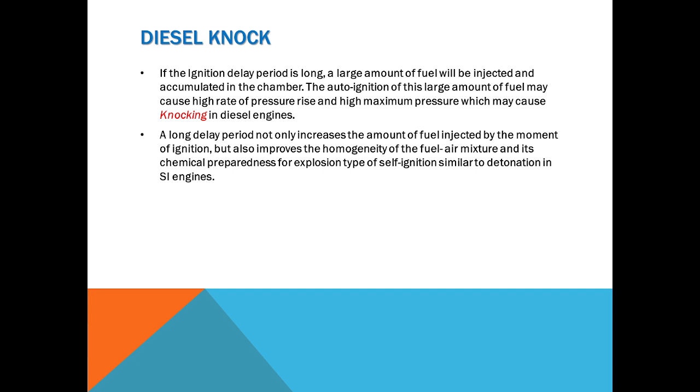A long delay period not only increases the amount of fuel injected by the moment of ignition, but also improves the homogeneity of the fuel air mixture and its chemical preparedness for explosion type of self ignition, similar to detonation in SI engines.

Methods of controlling diesel knock. Diesel knock is an abnormal combustion where we have observed that if the time required for ignition is more, due to the larger amount of fuel available for combustion, a large amount of pressure is generated and knock is observed.

What are the different methods to control diesel knock? The first is high charge temperature. If the charge temperature is high enough, then there will be a shorter ignition delay period and no accumulation of fuel will be observed in the combustion chamber.

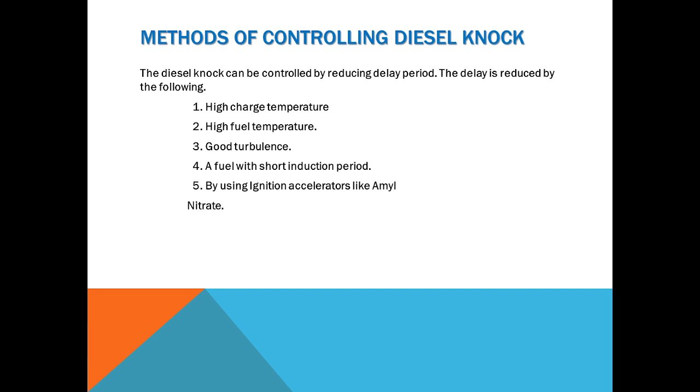Then high fuel temperature, good turbulence, a fuel with short induction period, and using ignition accelerators like amyl nitrate.

Now we will compare the phenomenon of detonation in SI engine and knocking in CI engine. Detonation occurs near the end of combustion, whereas knocking occurs near the beginning of combustion, that is, at the end of the first stage of combustion.

Detonation in SI engine is of a homogeneous charge causing a very heavy rate of pressure rise and high maximum pressure, whereas knocking in CI engine is of an imperfectly mixed charge, and hence the rate of pressure rise is normally lower than that in the detonation of the SI engine.

In case of detonation, pre-ignition may occur. Hot spots develop near the spark plug, and even before the spark ignition, the ignition may occur. In case of knock, fuel is injected into the cylinder only at the end of the compression stroke, and there is no question of pre-ignition or premature ignition.

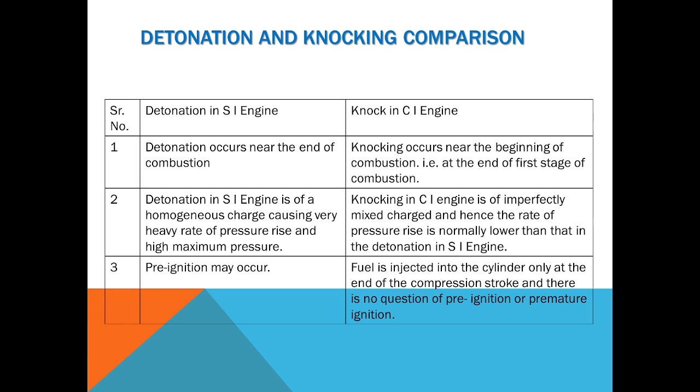Detonation in SI engine is easily distinguished from normal combustion, whereas knocking is not easy to distinguish from normal combustion. In case of SI engine, a large cylinder promotes detonation.

If the size of the cylinder is larger, then the charge available at the end of the combustion chamber ignites before the flame actually reaches there. So a large cylinder gives more chances of detonation, whereas diesel knock is reduced with an increase in size of the cylinder.

In case of diesel engine, if the size of the cylinder is larger, no accumulation of fuel droplets will happen at the beginning of combustion. The fuel droplets will be spread throughout the combustion chamber, so a larger cylinder size is desirable in CI engine.

Compression ratio in SI engine is limited by detonation. We know that the higher the compression ratio, the higher the temperature, and the higher the temperature, the greater the chances of detonation.

Whereas in CI engine, a higher compression ratio causes a lesser ignition delay and hence a lesser possibility of diesel knock. In diesel engine, we want high temperature so that it reduces the ignition delay, so the compression ratio should be as high as possible.

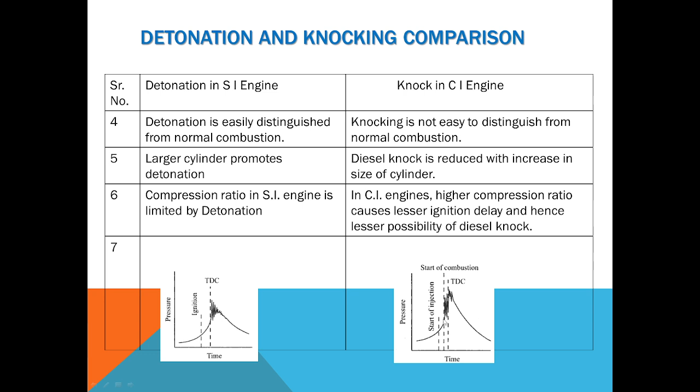In this diagram, we may clearly see that detonation actually happens at the end of combustion, whereas knocking happens after the first stage, that is, the ignition delay period. This is the abnormal combustion in CI engine.

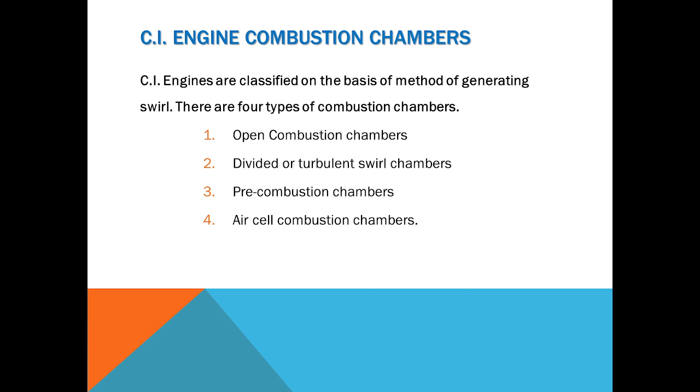Now we'll see the different types of combustion chambers used in CI engine: open combustion chambers, divided or turbulent swirl chamber, pre-combustion chamber, and air cell combustion chambers.

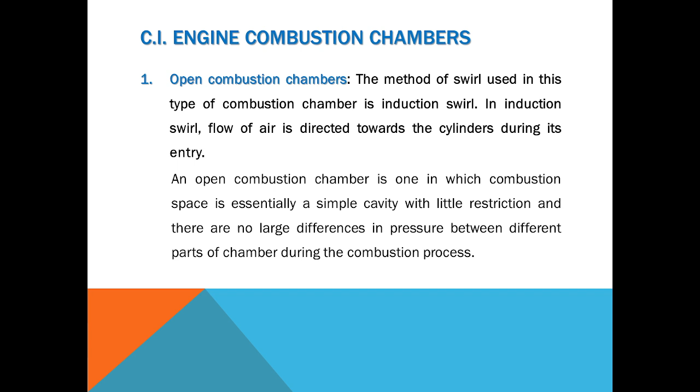Open combustion chamber. In open combustion chamber, the method of swirl used is induction swirl. In induction swirl, flow of air is directed towards the cylinder during its entry. An open combustion chamber is one in which the combustion space is essentially a simple cavity with little restriction, and there are no large differences in pressure between different parts of the chamber during the combustion process.

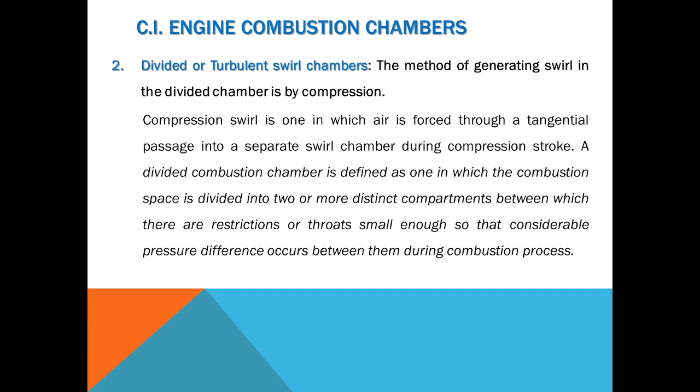Divided or turbulent swirl chamber. The method of generating swirl in the divided chamber is by compression. Compression swirl is one in which air is forced through a tangential passage into a separate swirl chamber during the compression stroke. A divided combustion chamber is defined as one in which the combustion space is divided into two or more distinct compartments, between which there are restrictions or throats small enough that considerable pressure difference occurs between them during combustion.

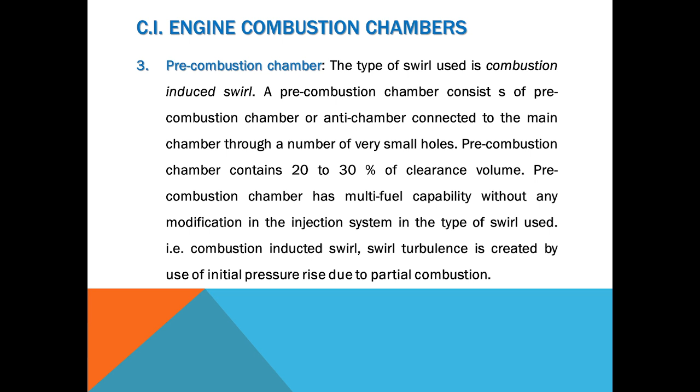Pre-combustion chamber. The type of swirl used is combustion induced swirl. A pre-combustion chamber consists of a pre-combustion chamber or antechamber connected to the main chamber through a number of very small holes. The pre-combustion chamber contains 20 to 30% of clearance volume, and has multi-fuel capability without any modification in the injection system. Swirl turbulence is created by use of initial pressure rise due to partial combustion.

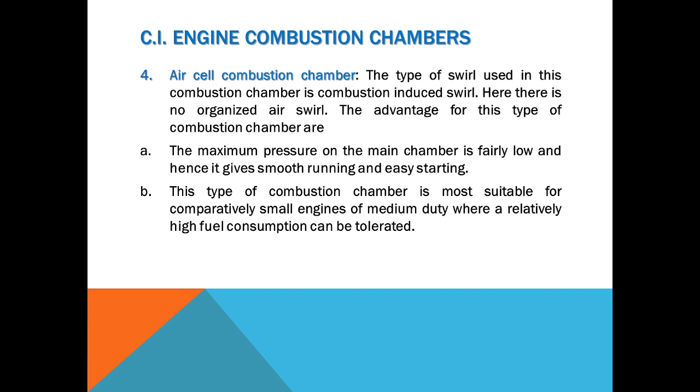This type of combustion chamber is most suitable for comparatively small engines of medium duty where relatively high fuel consumption can be tolerated. So here we have direct injection and indirect injection.

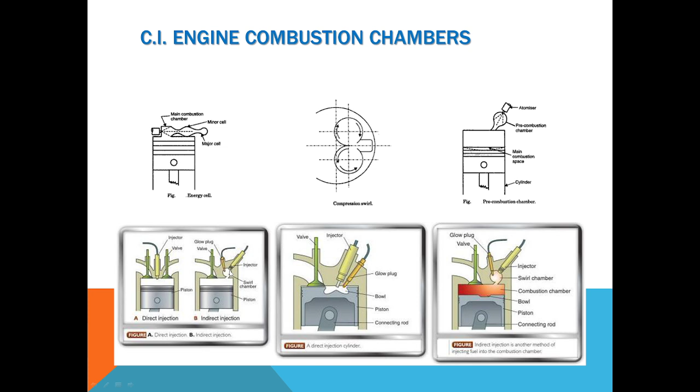This is direct injection. This is compression swirl, we'll see. You may check direct and indirect injection, where here the injection happens and then after mixing it is given to the cylinder. So these are the types of combustion chamber.

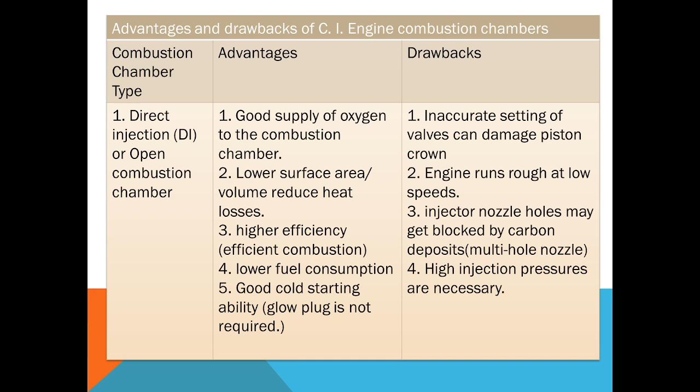Direct injection chamber: good supply of oxygen to the combustion chamber, lower surface area, high efficiency, lower fuel consumption, and good cold starting ability. Now the drawbacks: inaccurate setting of valve can damage piston, engine runs rough, injector nozzle hole may get blocked, high injection pressure are necessary.

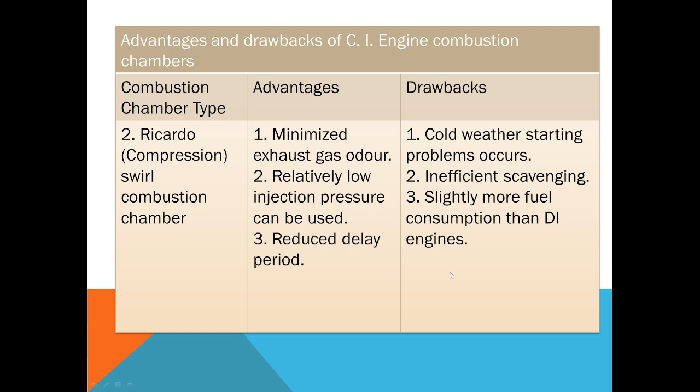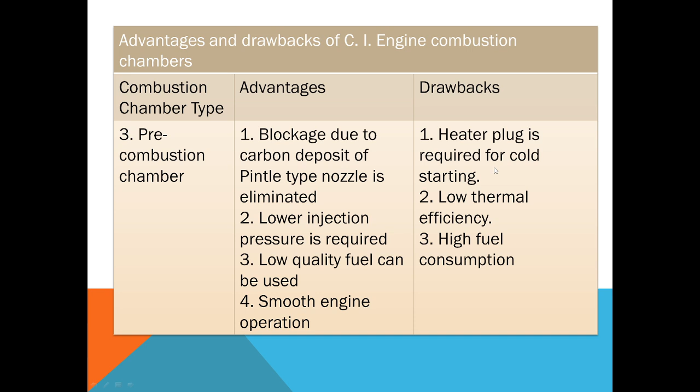Advantages: blockages due to carbon deposit of pintle type nozzle is eliminated, lower injection pressure is required, low quality fuel can be used, and smooth engine operation. Whereas drawback: heater plug is required for cold starting, low thermal efficiency, high fuel consumption.

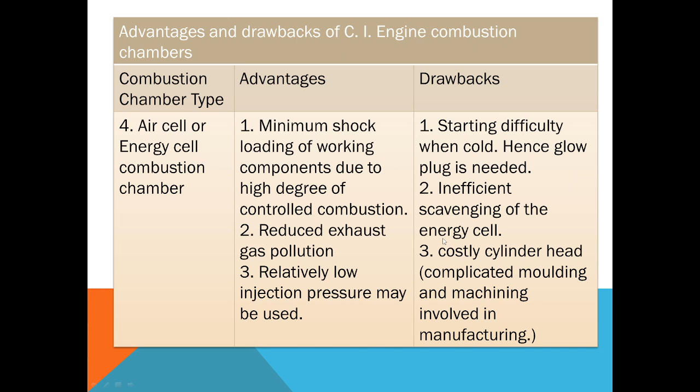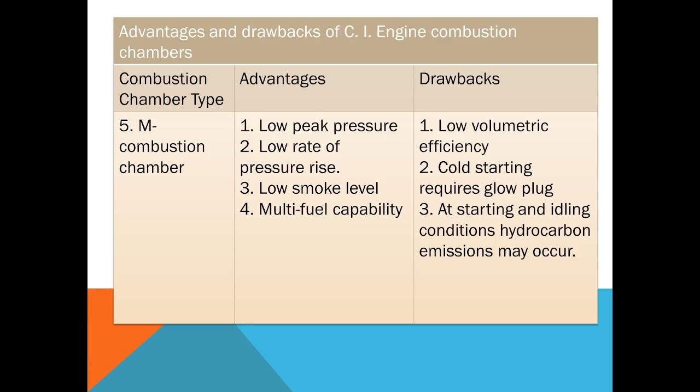So in next class we'll see the comparison of SI and CI engine. Thank you.